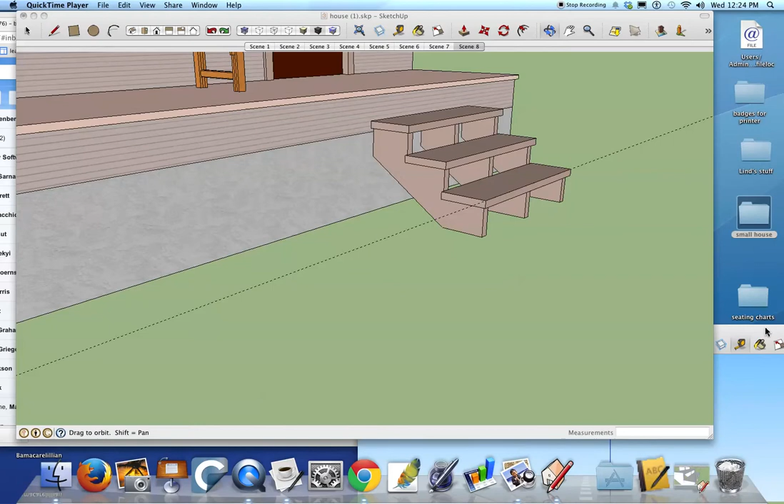So here's how you need to get started. Start with a new window in SketchUp. Actually, I will make a brand new window, so we'll both be starting out in the same place.

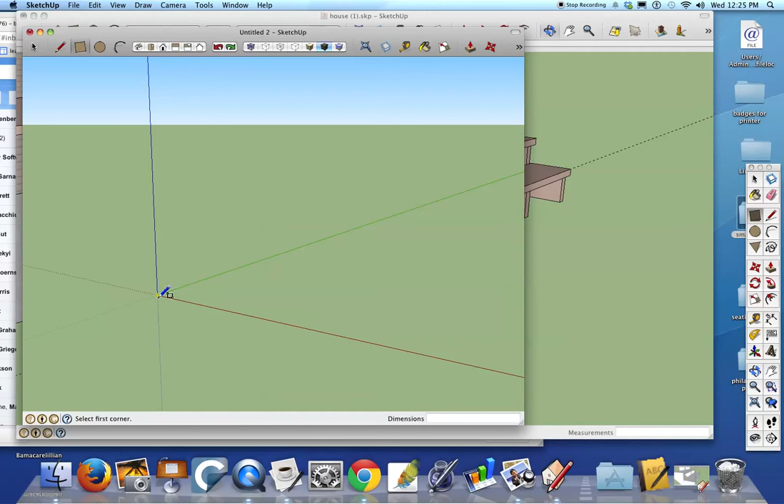I'm going to delete the woman that appears there for size, and then I'm going to draw a step that is 4 feet by 12 inches. I want to zoom in, and I'm going to raise that step up 2 inches, and orbit around.

So I need to triple click and right click and make it into a component. We're going to name this step.

Okay, now right now it's on the ground. It needs to be up a total of 9 inches. I'm going to move this up, but I'm not going to move it up 9 inches. I'm going to move it up 7, but you'll see that that works out to be correct.

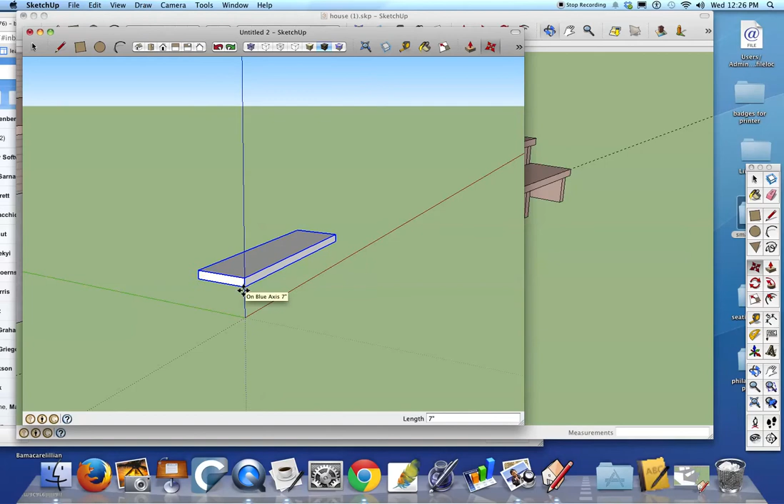So with the move tool, I'm going to start bringing it up. It's at 7, or I could type in 7. And now if I measure from here to this point, I'll see that that's actually 9 inches. So the first one has to move up 7 inches. After this, we'll be moving them up 9 inches.

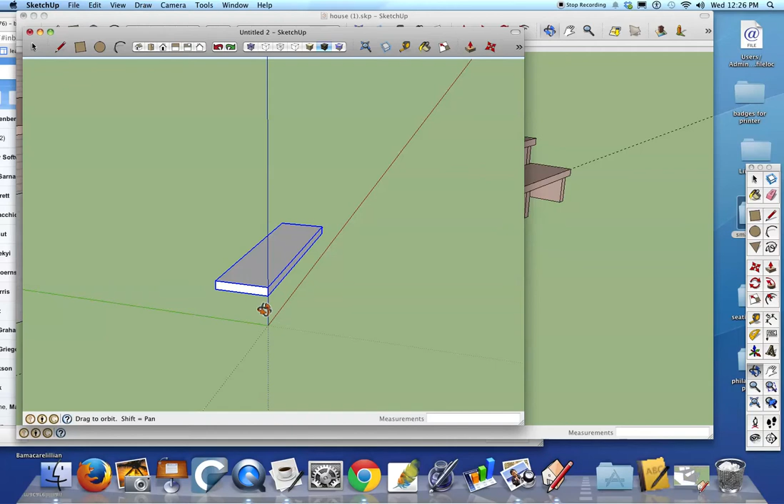Okay, I've made one step, and since this is a component, I can copy it, and I will do that with the Move tool. I'm going to tap Option here to bring off a copy and just put it right there. And now I'm going to move this one up, but I'm going to move it up 9. We'll measure that just to make sure it's correct. So I want it from this point to here to be 9 inches, and it is.

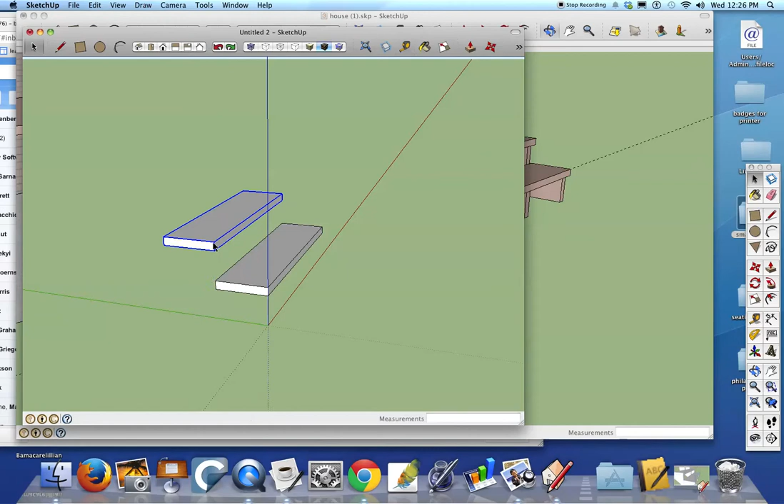And then I'm going to repeat this process one more time. So I'm going to press Option and bring off a copy, and then move it up along the blue axis 9. So the first one was up 7, the next 2 are each up 9.

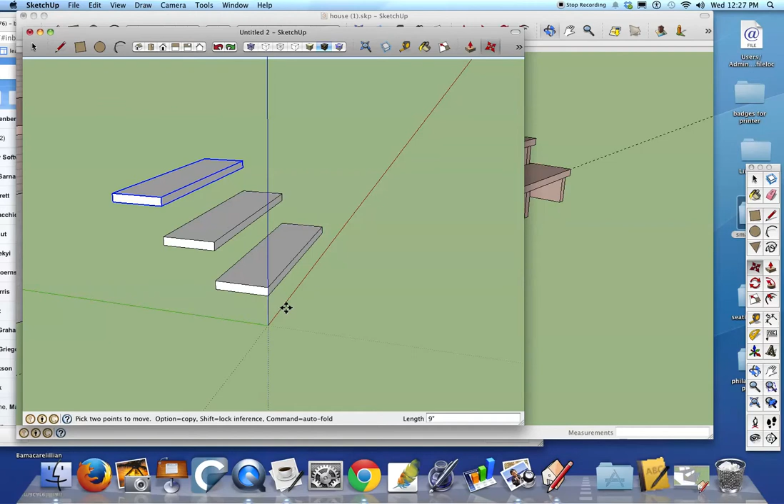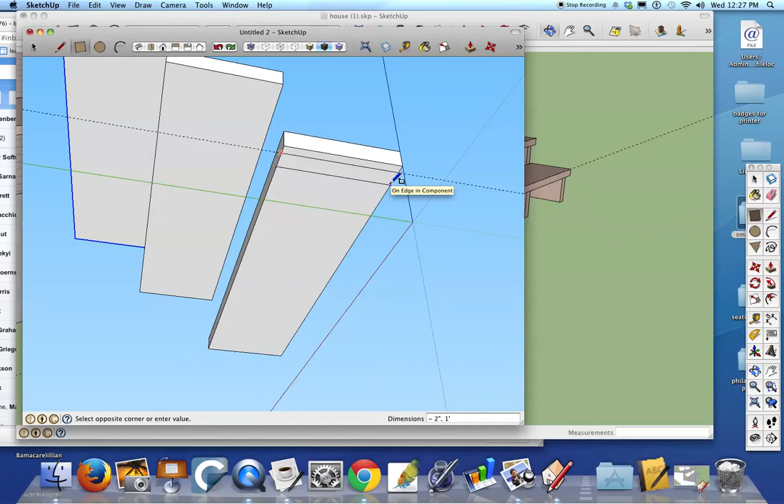The next thing I'm going to make is the riser, and that one is pretty easy. I think I will put it in a little bit from the step, so I'm just going to bring it in 1 inch here, and I'm going to make it a rectangle that is 2 inches by 1 foot. 1 foot is the depth of the step.

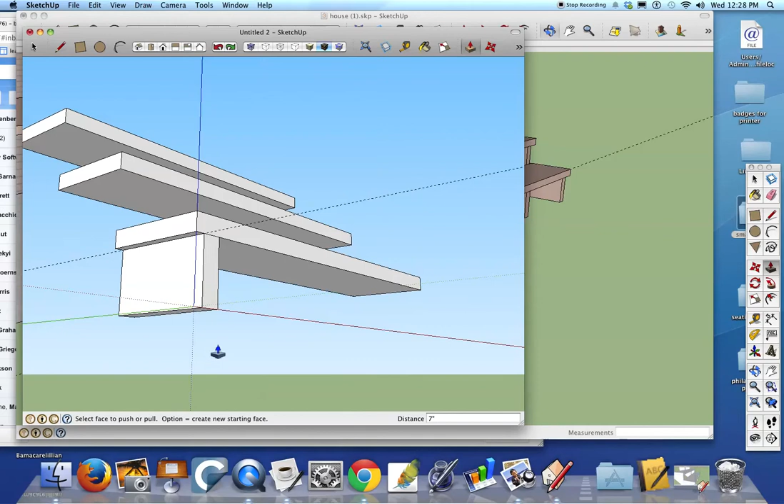And then I want this one to be on the ground, and that, I believe, let's see, how much is that? That's 7. Okay, so that'll be a 7-inch riser, we're going to call this piece. Okay, and it's right on the red there where it should be.

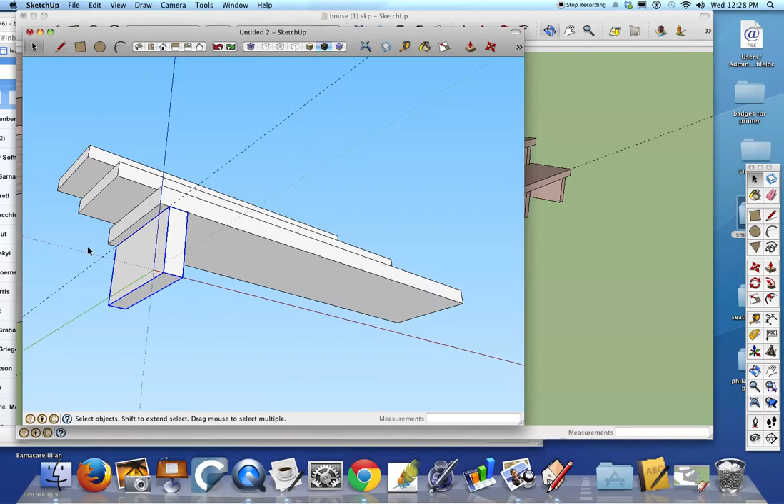I'm going to triple click this and make it into a component and call it small riser, because when I put them all together, that'll be the large riser. And now I simply need to put one here and here. So I want to measure in a guideline at 1 inch, and I'm going to do the same thing here so I have them all correct.

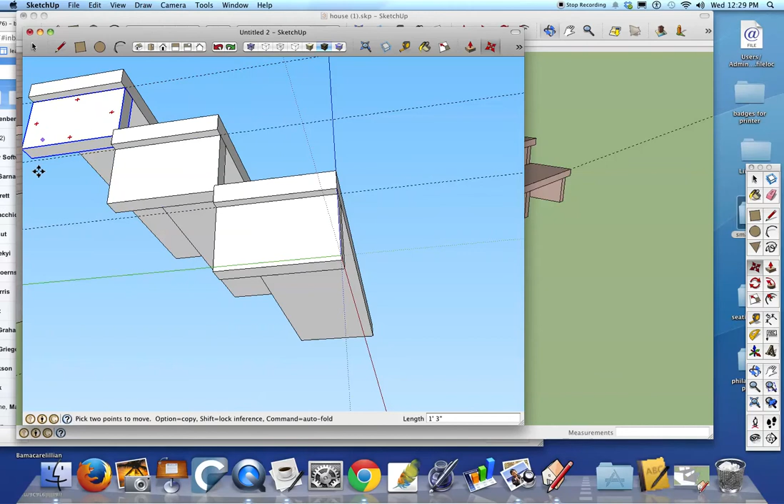Okay, so now I'm going to make a Move tool, Alt, and just put it right there, and then we're going to Move tool, Alt, and take this point and put it there, up at that intersection. Okay, this is what we have so far.

Now I'm going to edit this riser. It's a component, remember. I'm going to go down to Edit Component.

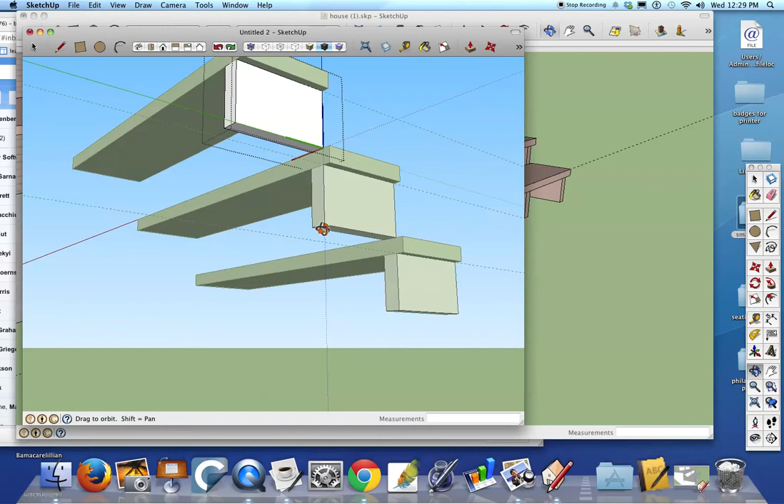And I'm going to draw a line from here to here. I want to make a triangle out of this. So I'm going to draw a line from here to here to here, and that's enough to draw that triangular shape all the way down.

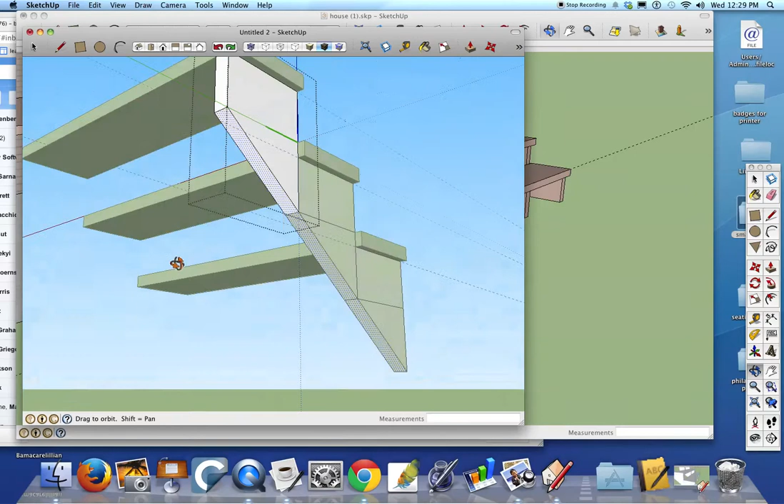And then I'm going to pull it through so it becomes the thickness, okay? And I don't want this one piece down here, and actually I am able to come down and edit just this one out. I'm going to choose this and explode it. That will allow me to get rid of this without affecting those parts.

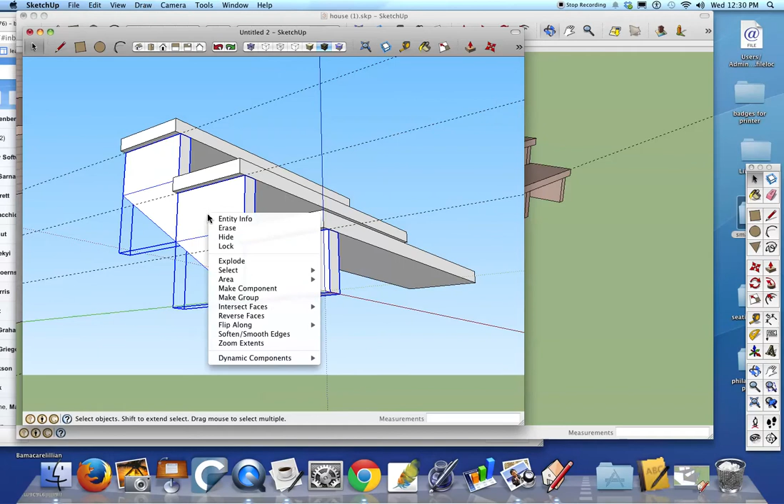Okay, so now we're going to triple click all of, whoops, I'm not going to do that. I'm actually just going to click on each one of these, and I guess I need to, so can I triple click? Yeah, okay. I'm going to just make that a group. And now I'm going to select this, and I'm going to make all of these a group as well. A group is something you don't want to edit, but you want it to move as one piece.

Now I want to move that riser. I want to put down one here at this end, and I want to put one in the middle. So first let me make some marks.

So I have these, and I want to make a center mark here. I should be able to find my center. It's 2 feet regardless, because this was 4 feet, correct? 2 feet, 1/2 inch. There we go, 2 feet.

That's my center, but why don't I make it from here? How much smarter is that? So 2 feet, and then I'm going to come out 1 more inch because of the thickness, and then I'm going to make another guide from this end in 1 inch, and then I'm simply going to copy my

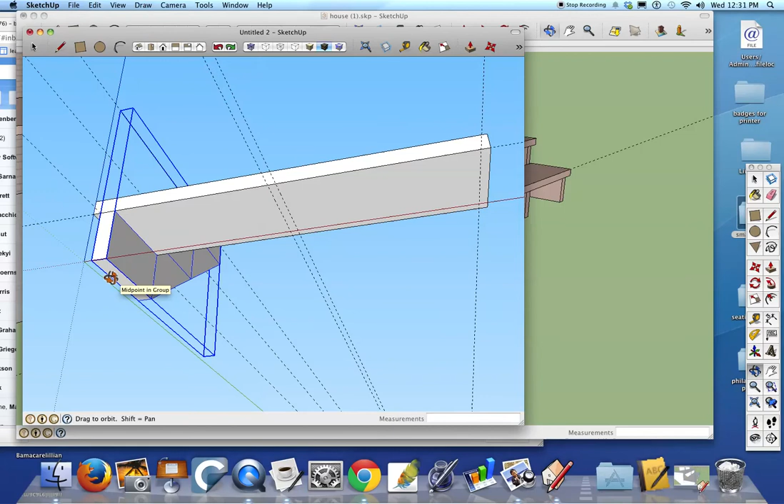group, and I believe I can just do that the same way. It's all grouped, and so I'm going to use the Move tool, and I want Alt, and I should be, whoa, yep, that's doing it.

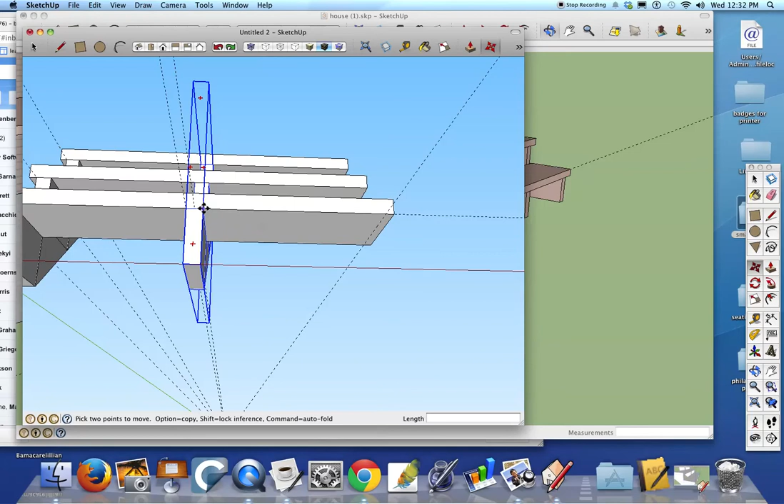And I'm just going to put it at that mark that I made, and then slide along, and I'm going to use the Move tool again. This time I'm going to come over on the other side, Alt, and line that one up here. And if I orbit around, it's totally great.

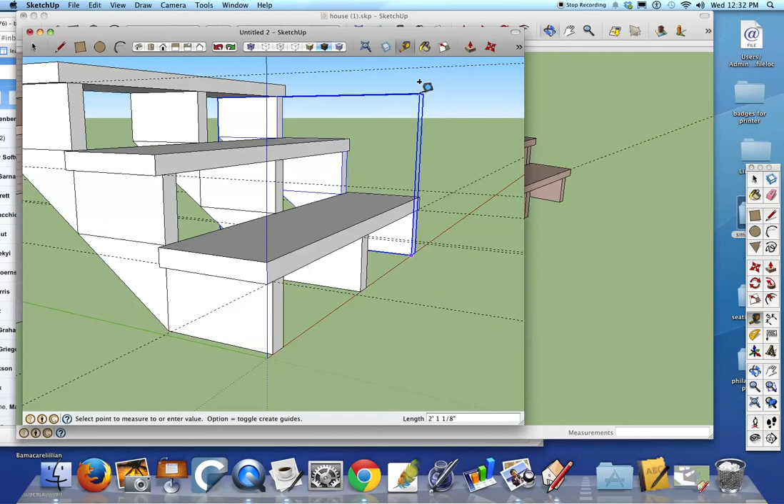And the one thing I want to make sure of is that my total height of this is actually 27. And so from here to here that's 2 feet, 1 inch plus another, so that's 24, 25, plus another 2 inches up here is 27. It's 27. One last thing that will make this nice is to pull the face of this step out some,

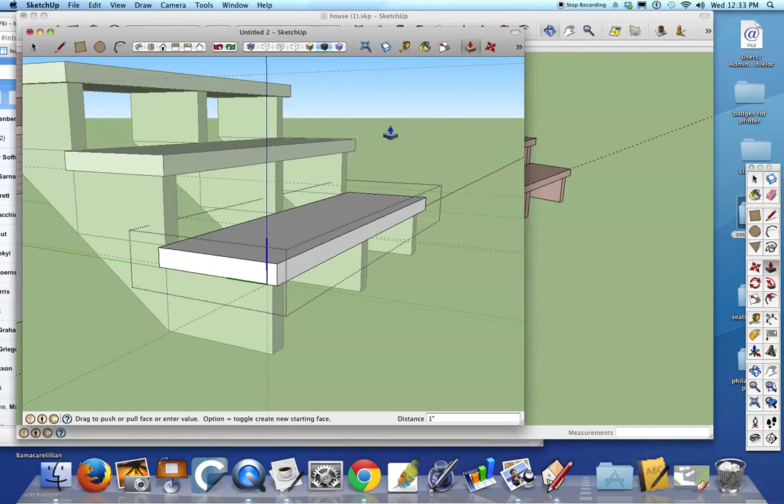and since it's a component, if I edit this particular one, it will pull the other steps out as well. And that's just kind of a nice little adjustment to make. Okay, so looks great.

That's all you need to do, and good luck. I'll hide, let's delete the guide so we can see it in all its glory. Most likely you can come along and delete these lines. I'm not going to right now.